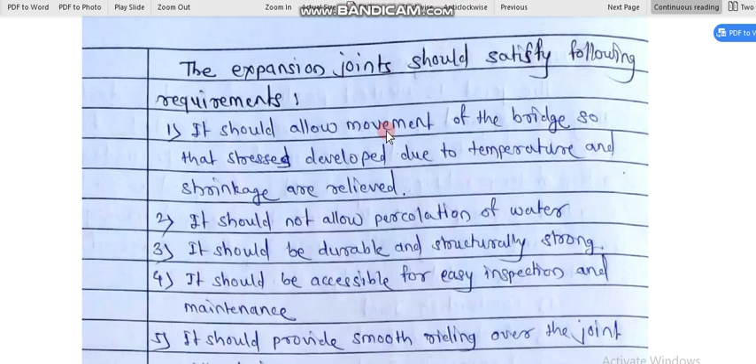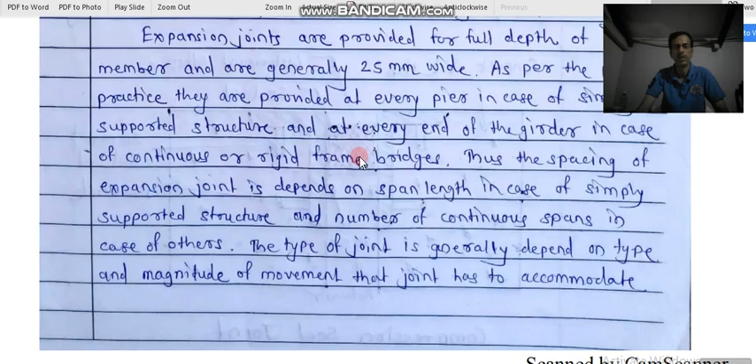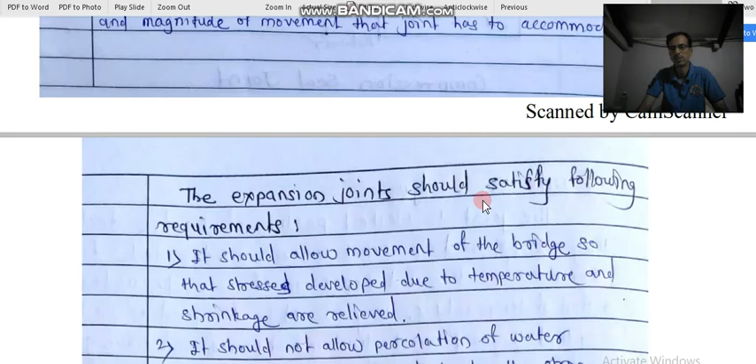In the previous lecture we studied the various types of joints in a bridge. Out of those, we have three joints: construction joint, contraction joint and expansion joint. We studied the expansion joints in detail. So the expansion joints should satisfy the following requirements.

It should allow movement of the bridge so that stresses developed due to temperature and shrinkage are relieved. The expansion joint should allow movement of the bridge like this - it should expand like this and contract like this due to thermal changes.

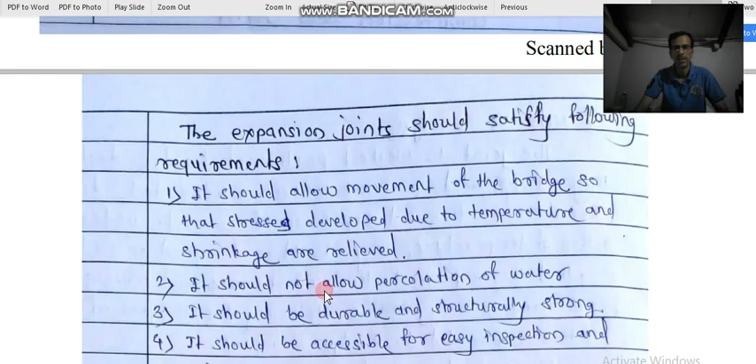It should not allow percolation of water. Since expansion joints run throughout the depth of the deck slab, the material filled in the expansion joint should not allow water inside it. That is another function of this.

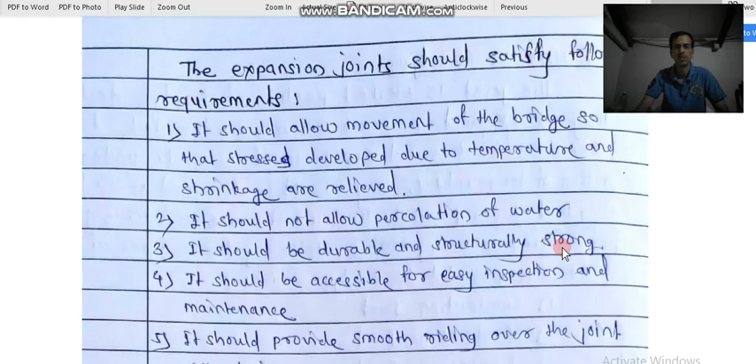Next, the third one is it should be durable and structurally strong. This expansion joint should be durable and structurally strong.

It should be accessible for easy inspection and maintenance, so if you have to do maintenance of the expansion joint, it should be easily accessible. And it should provide smooth riding over the joint without jerks - while riding through that bridge or expansion joint, the rider should feel a smooth feeling and not feel jerks while riding on that bridge.

So these are the various functions of the expansion joints. Related to this, we will see one video, taken with a high range, high frequency camera, showing how the expansion of the bridge occurs.

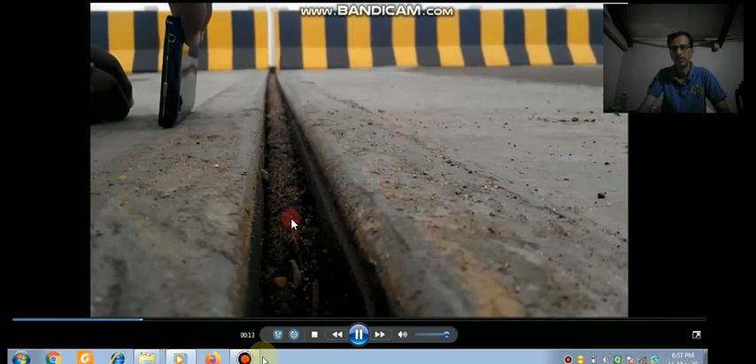See this - this is a bridge. In this bridge, a mobile camera is attached, and another camera is there. With this camera you can see the bridge is expanding. This vehicle is coming, and because of the vehicle movement this bridge is expanding and contracting. This is the sealant material filled inside this expansion joint.

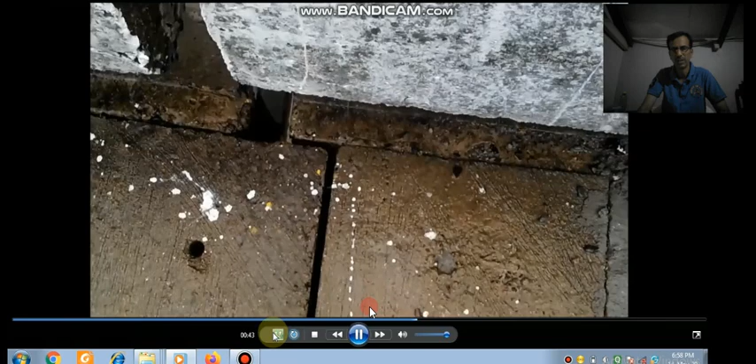See this movement of the bridge. This movement cannot be visible to our naked eyes, but it is captured with high frequency cameras, so you can see this expansion of the bridge. So this is about the expansion of bridges.

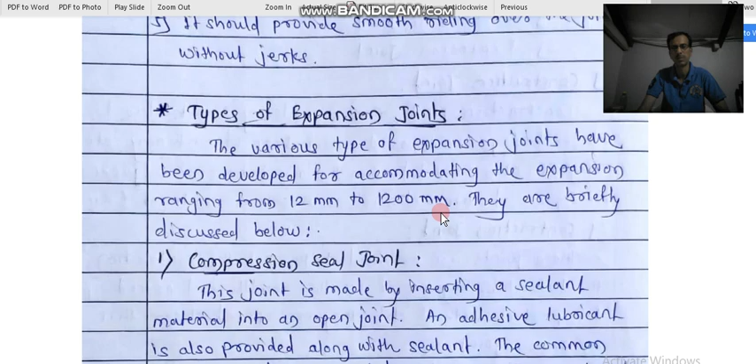Now we will cover the various types of expansion joints. Various types of expansion joints have been developed for accommodating expansions ranging from 12 mm to 1200 mm - see the range of expansion joints. They are designed to have that expansion capacity, that is 1 meter and more in some special cases. They are briefly discussed below.

Compression seal joint is the first type of expansion joint. This joint is made by inserting the sealant material into an open joint. An adhesive lubricant is also provided along with the sealant. The common material used is extruded neoprene as the sealant in the expansion joint.

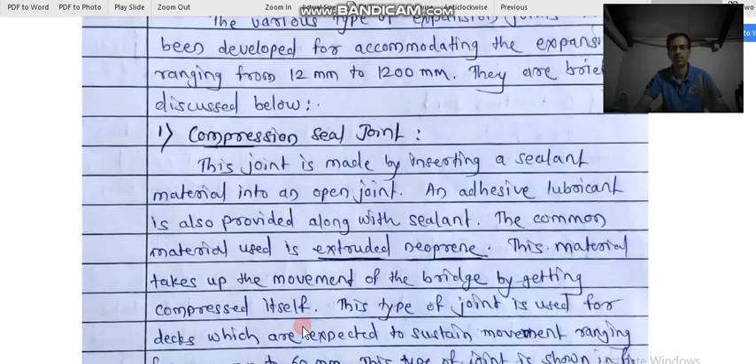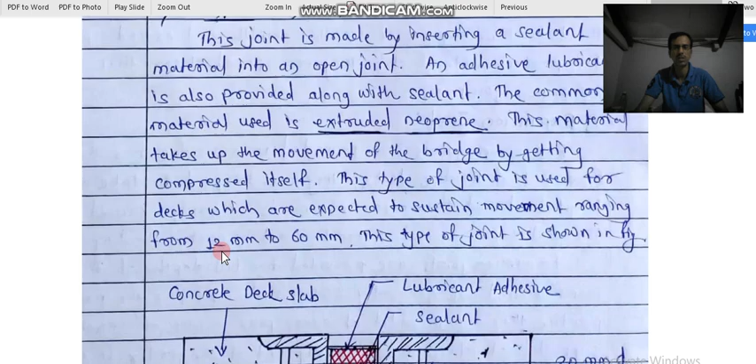This material takes up the movement of the bridge by getting compressed itself due to the load. This type of joint is used for decks expected to sustain movement ranging from 12 to 60 mm. Up to 60 mm movement, these types of sealants are provided, and this type of joint is shown in this figure.

So this is a figure - this is the deck slab, this lubricant is filled, this is the gap expansion joint. These may be 10 mm retainers, this is 150 mm, 20 mm diameter studs are there. This is the steel section, and between the two steel sections the lubricant, adhesive and sealant is provided in this expansion joint.

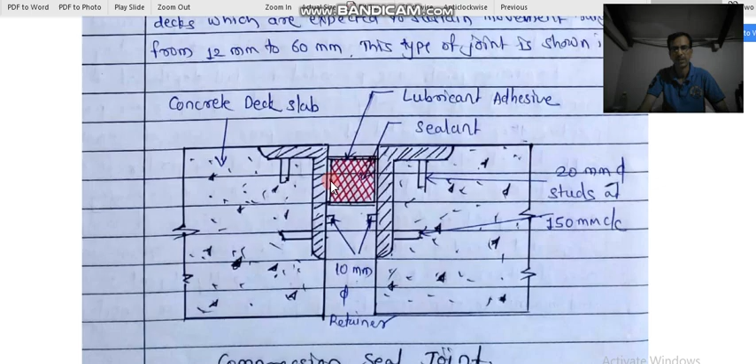See this - the joint runs throughout the depth of the slab. This is a concrete deck slab, and this joint is provided throughout the deck. So this is the compression seal joint.

Second type of expansion joint is strip seal joint. This type of joint consists of an elastomeric material placed between dual rails that are anchored to the face of the joint opening. In case of rails, these types of joints are provided. The most commonly used material is neoprene rubber as a sealant in this case.

Here the material is mechanically fitted into the steel rail assembly, in case of railways, and the joints can accommodate a movement up to 100 mm.

The third type of joint is the modular joint, another type of expansion joint. A modular joint uses multiple strip seals to have very large deck movement. The seals are fitted between the rolled beams which run along the length of the joint, and this type of joint can accommodate movement ranging from 900 mm to 1200 mm, and it is used for skewed and curved decks.

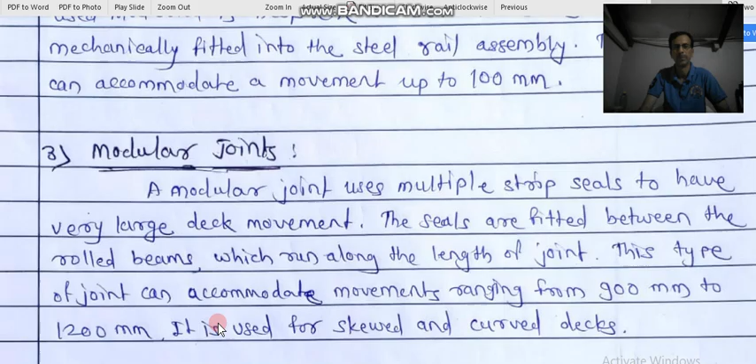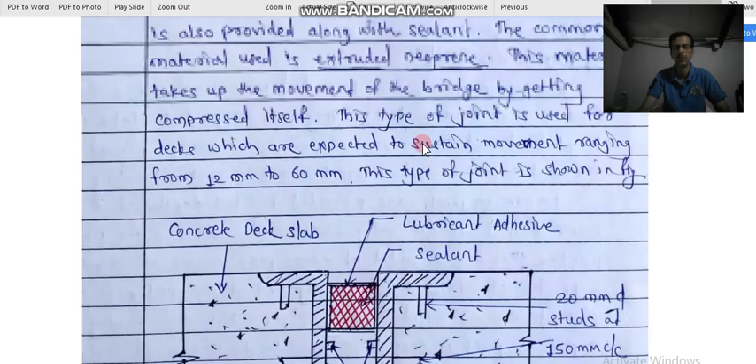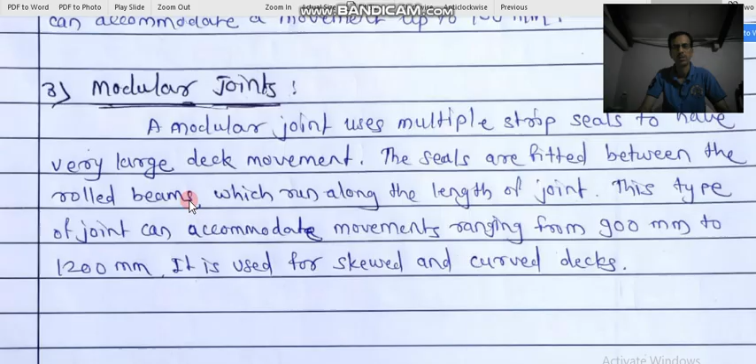So the movement of the expansion joint ranges from 900 mm to 1200 mm. As we discussed previously, expansion joints range from 12 mm to 1200 mm. For 12 mm to 60 mm, compression seal joints are provided. Up to 100 mm expansion, strip seal joints are provided, and for expansion up to 900 to 1200 mm, modular joints are provided. So these are the three various types of expansion joints.

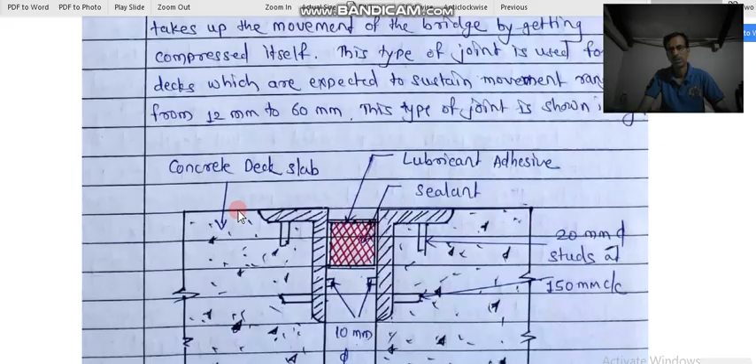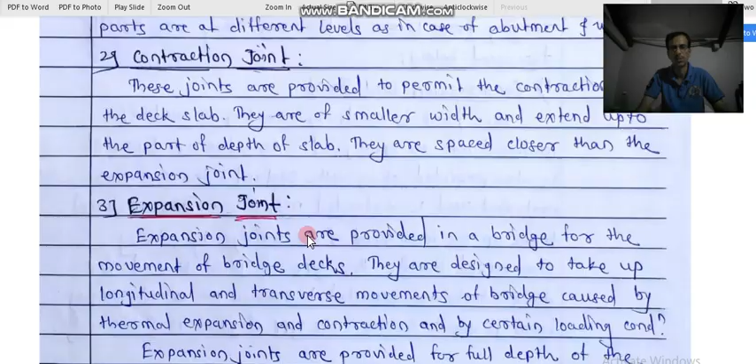This is about the last unit, unit number 6, that is bearings and expansion joints. In the previous lectures we studied the various types of bearings and design of elastomeric bearings, and in these two videos we studied the expansion joint and its various types. So this is about unit number 6.